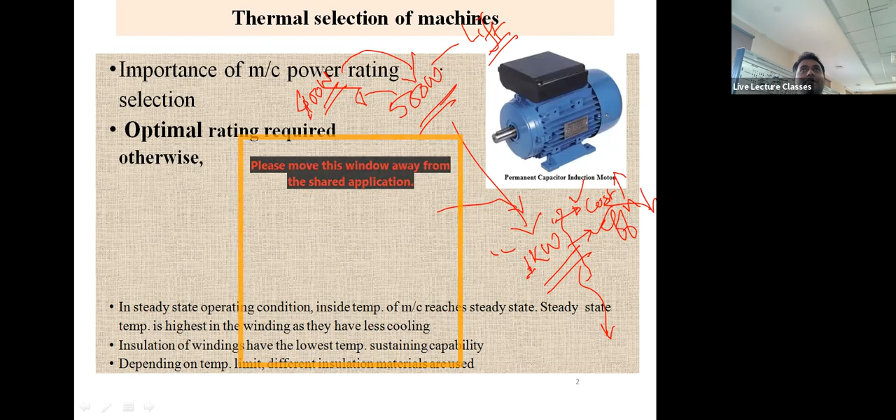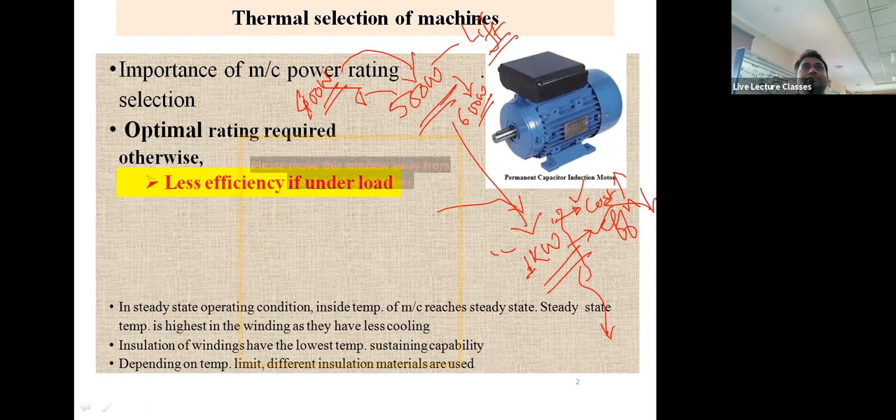And what if you have 500 watts and you are giving only 400 watts? Say this is a lift, a small type of lift that needs 500 watt of power. If you're applying 400 watts of power, what will happen? It will take up the load up to some extent because the difference is low, but overheating will be happening. And then efficiency will be down because you are running the motor above the rating, and there are chances of failure also. So if 500 watt is its rating, you can go for hardly 600 watts motor. That is good enough.

Less efficiency if underloaded, failure if overloaded. Associated power equipments like converter, etc., may get affected. So who is driving the motor? The power electronic controller. So if you are using 1 kilowatt system instead of 500 watt and your power controller is also 500 watts, then is it not a mismatch? It will affect the power electronic item, no?

Say it is a power electronic controller of 500 watts and this is a motor of 1 kilowatt. Now for 500 watts it is working perfectly. Now suppose if the load is increasing, say 750 watts, will there be any problem with the power electronic controller? Yes, obviously, because you have kept only 500 watts. And if you're using the cheaper ones like the Chinese ones, then it will get busted after 500 watts only, because for the Chinese electronic controllers, the overload capacity is very, very less. So that's the reason why their products are very cheap. So if it is rated 500 watts, you should obviously use it below 500 watts only, because power electronic controllers, depending upon the cost and the quality, it might get destroyed also. Costly if overrated.

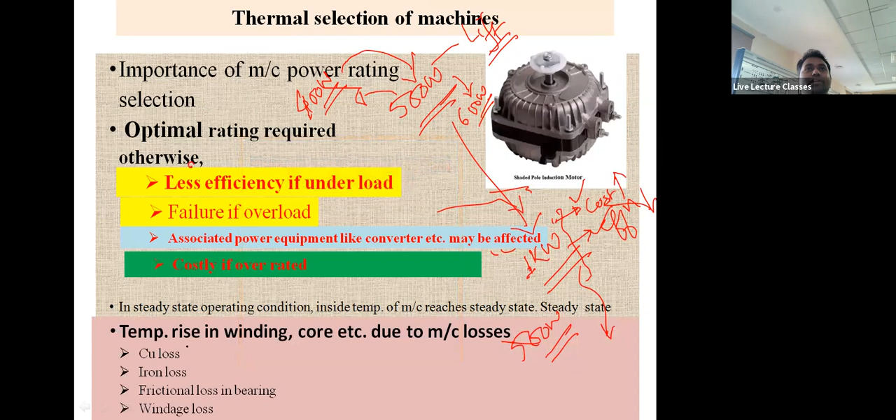So temperature rise in winding core due to machine losses. So if you are underrating the device, first of all, it may fail. And if you are overrating, the efficiency will go low. So if the efficiency goes low, the copper loss, iron loss, frictional loss in bearing, windage loss, everything will increase, especially the copper loss and iron loss.

Then the machine insulation classes. This window is disturbing very much. No, what to do with this window? Still could not get it.

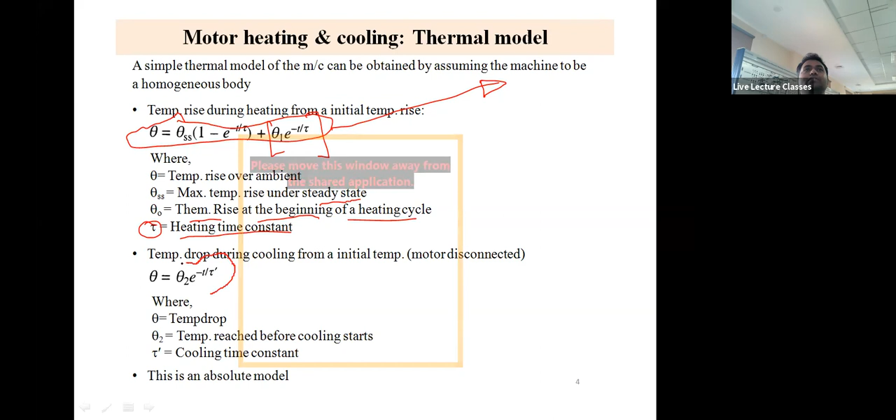So temperature drop during cooling is given by this formula. This is an absolute model, not an empirical one. It is not empirical, meaning it is calculated by maths directly. You can get the results if you put the values here.

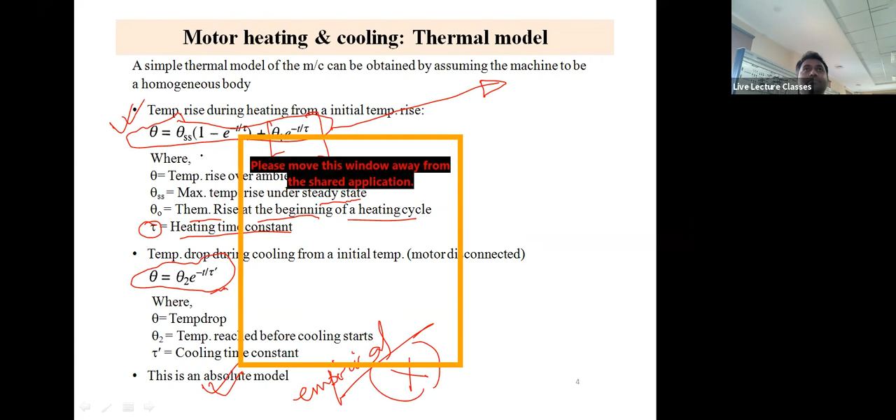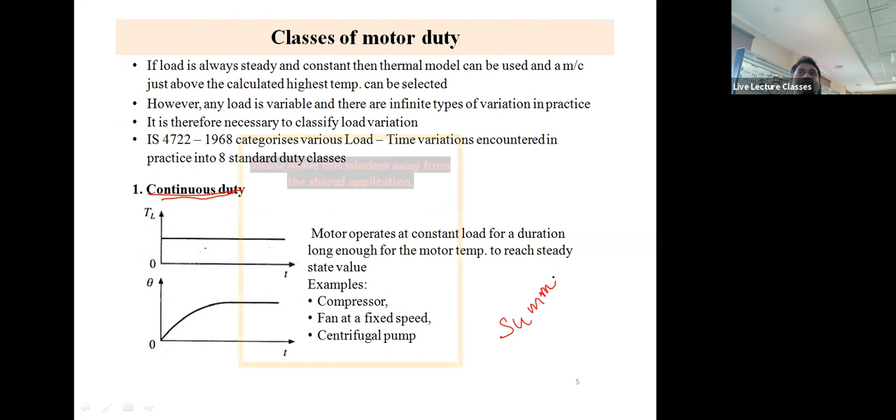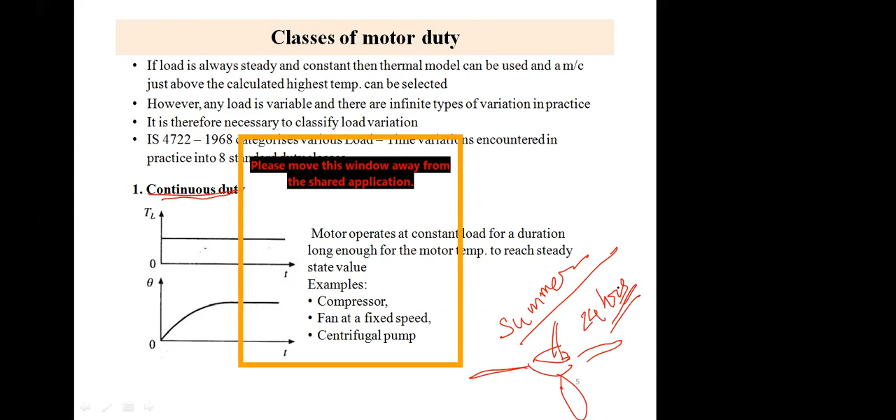So, classes of motor duty. This is very interesting. First, we are taking continuous duty motors. Like in the summer season, for how much time is the fan on? 24 hours, I think it's already on for 24 hours, right? Hardly we get it off. So if you are there in the home, it will keep it always on. So it is a type of continuous load.

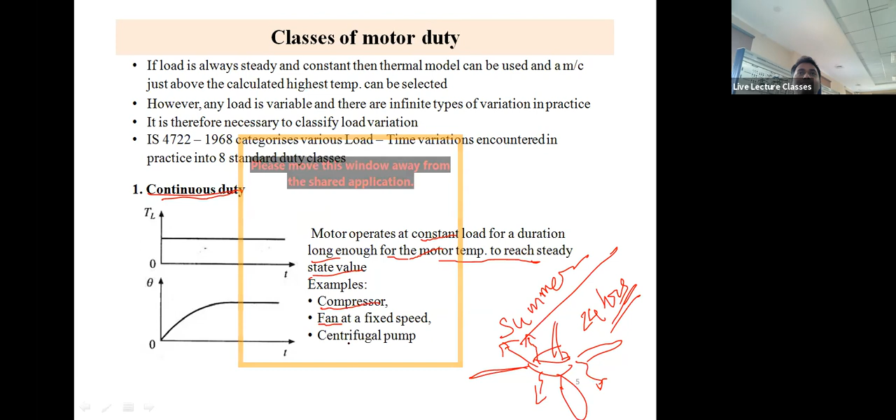The motor operates at constant load for a duration long enough for the temperature to reach steady state value. What if the temperature keeps on rising in this fan? Then the windings will burn out. So it has to dissipate the heat also, that is why it can run for a long time. Examples are compressor, fan at fixed speed, centrifugal pumps like water pumps.

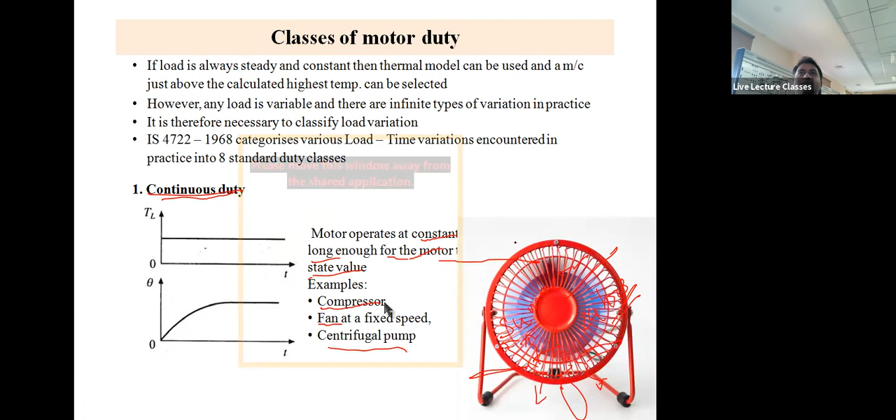So that's an example of a fan type load. Then this is the compressor type of load. This is a compressor type of load. This will rotate and the water will go inside. This will get pumped out through this pipe. That's a centrifugal pump.

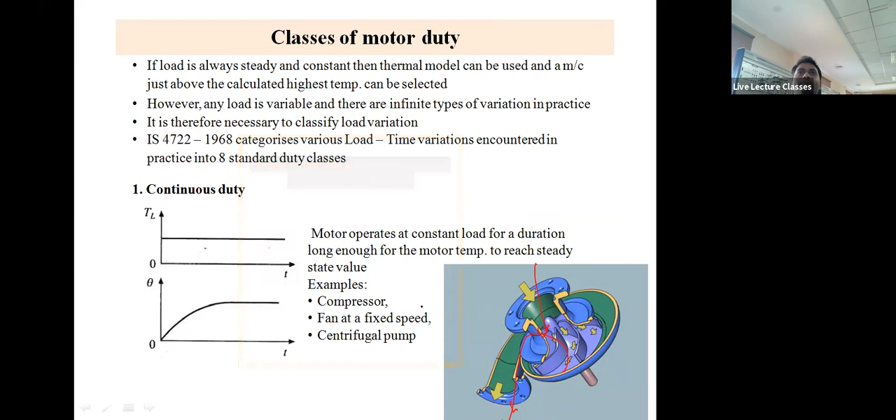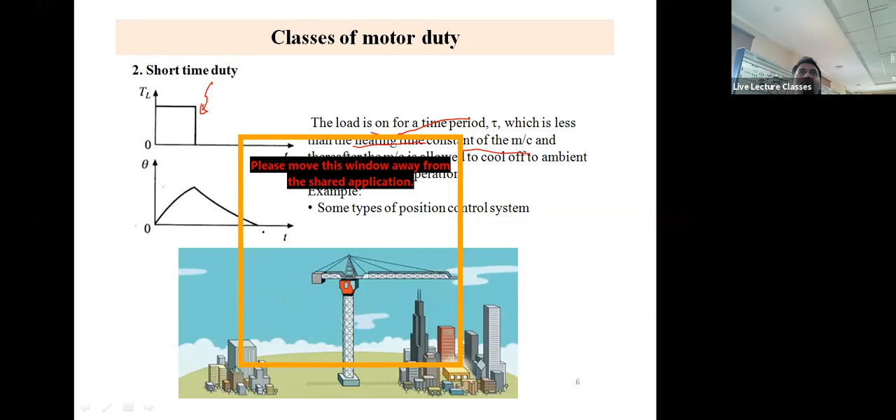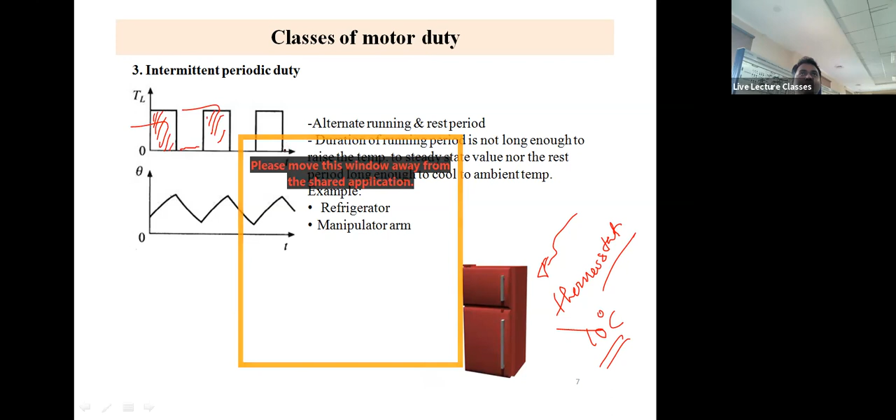Then it is intermittent periodic duty. What is this? Refrigerator. How does it operate? It has a thermostat. After reaching say 10 degree Celsius or whatever the preset value is, it will get switched off. So it is on for some time, then off for some time, and again on for some time. When the temperature increases beyond the predefined limit, again it goes off, on and off.

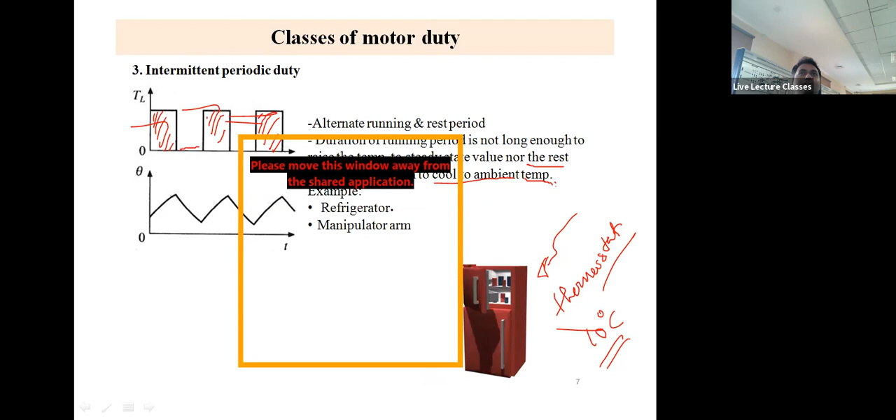So it is called intermittent duty. Duration of running period is not long enough to raise the temperature to steady state value, and the rest period is not long enough to cool to ambient temperature. I've already mailed you these slides, right? Yes, I gave to Deep, I think he already forwarded. So it's the refrigerator, the manipulator arm.

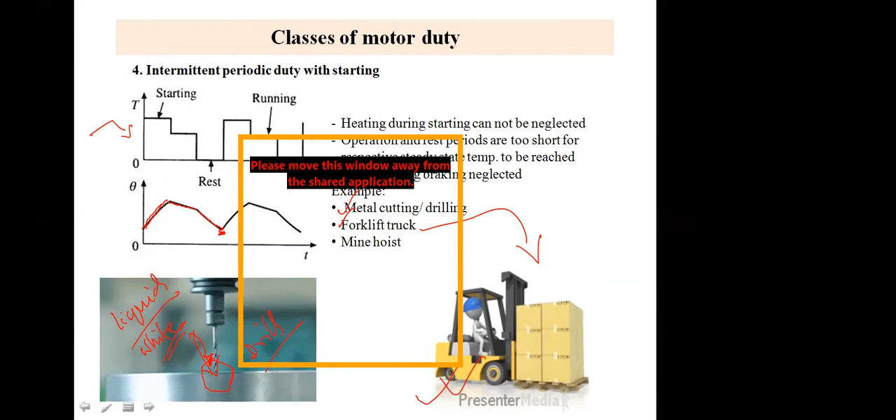Okay, think of this drill. When it is starting, why did it pause? When it is starting, say the heat is very high. Then when it is going inside, it is a bit lower heated. It doesn't have to brake, it's just resting after the drilling has been done. So that's it. And the same thing is with a forklift truck.

See, when the person is just lifting, it requires very high torque, and then the demand for torque decreases. So the temperature also decreases. So where is temperature coming from? Temperature is coming from actually the current factor, this I square R loss.

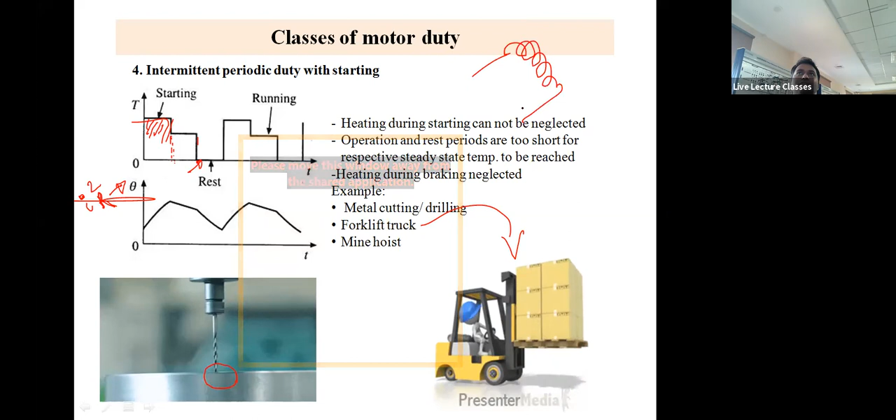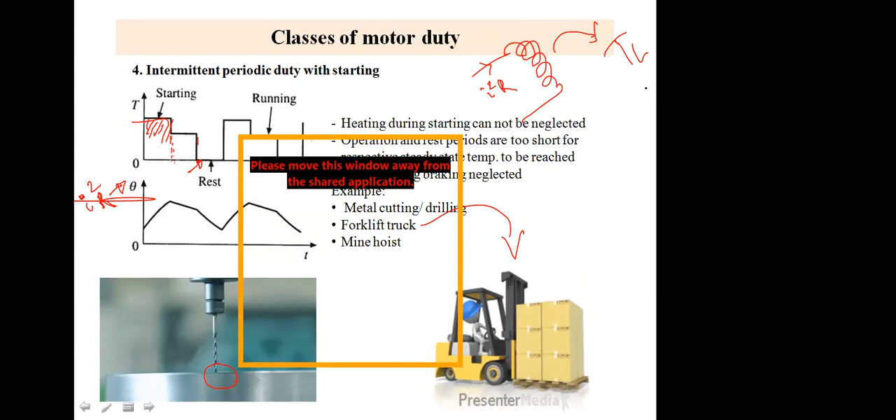First of all, the I square R loss in the motor. If it's a motor, it will have some current drawn, and it will have some I square R losses. Now this current is governed by the load torque, the requirement of the load torque. So the pattern of the load torque actually decides the pattern of the current.

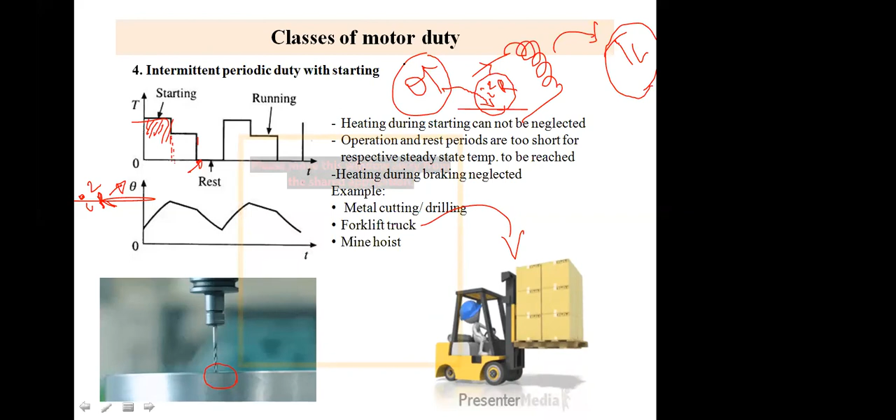And the pattern of the current decides the heat. So the more the heat, the higher is the temperature. Accumulation of heat will give more temperature. Okay? So that's the point, and so these points are being exactly followed.

So when it is starting, it is taking huge current, so the I square R loss is high, so the temperature rise is very high. And then after it has reached some type of operation steady state, it is going a bit low because the requirement of load torque during running condition is lesser than the starting. And then when the operation has gone down, the temperature goes down slowly.

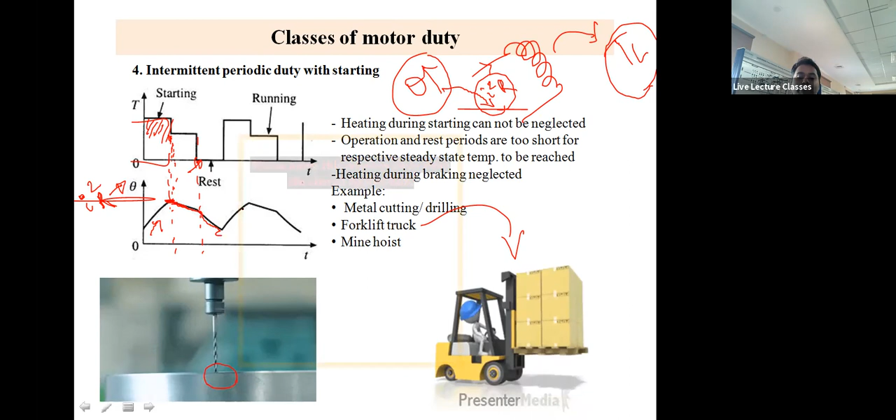Now, what about these types of loads? These types of loads are like electric trains. When they start, they will take a huge torque, right? And after it has started, it will require a lower torque to run it. The starting torque is definitely greater than the running torque.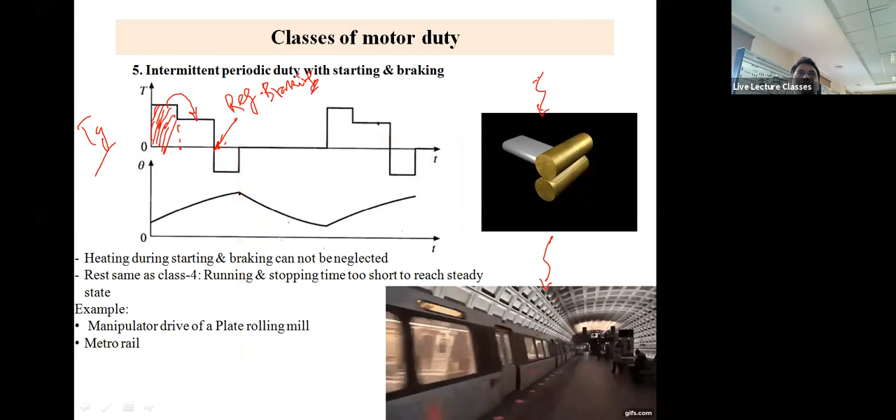And then when the station is approaching, it will go for regenerative braking. During regenerative braking also, the torque is reversed, meaning the generator torque is reversed, but there is a current flow from the load to the source. So it will first increase and then the temperature will keep on decreasing. Again at this point the train will start and it will again keep on increasing for the rest of the time. So this is called intermittent periodic duty with starting and braking.

Is it okay? Yes, sir. So classes of motor duty: continuous duty, fluctuating load, and all these things. Then determination of motor rating from the thermal point of view. Why is it important from the thermal point of view? Because after all, you need to keep the temperature of the motor at a safe limit. You cannot allow the motor to be heated just like flames.

So you need to keep the temperature lower, as low as possible. So you have to classify as per the duty cycle. This duty cycle is not that of the power electronics 4-quadrant choppers type. This duty cycle is of the load, or how much time the load will be on and off.

So motor selection for continuous duty, maximum power demand of load is determined. Say the load requirement is this much high, then it falls down to this much, and the running load is this much. This is very much evident for EV bikes, electric vehicle e-bikes. Say two persons are sitting on a bike, just imagine the amount of torque required to start it from 0 to say 10 kilometers per hour. Can you think how much current it will take out from the battery? Say it might be 100 amperes. But once it has reached a 10 kilometer per hour range, then what about the rest?

Say from 10 to 40 kmph. Yes, the requirement of running torque is lesser now. So this is called running torque. This is called the starting torque. So for the starting torque, the requirement is very high, but for the running torque it is lower. So that's why it will require lesser power.

But say this takes 100 amperes, so this is the peak, right? That is the peak current, and say in the steady state it needs 25 amperes. So just imagine you have designed a battery which can give only up to 30 amperes. So tell me, will your vehicle start with two people? Will your vehicle start? No.

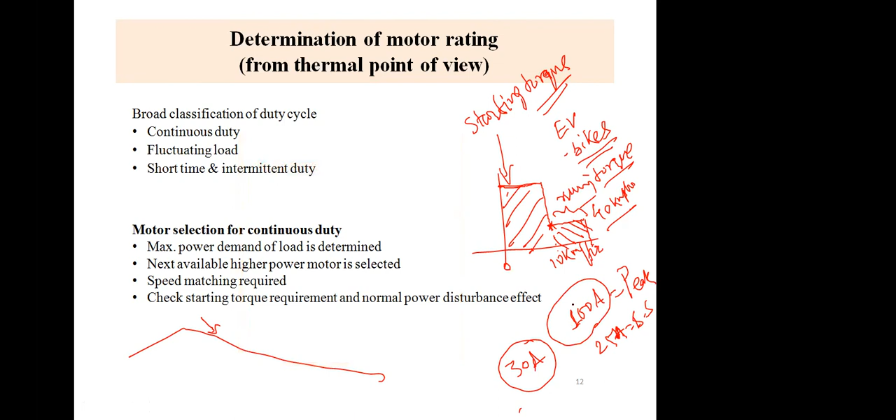Yes, it will start, but the surface has to be like this, right? It cannot be flat. If it is flat, it will not be able to pick up that 100 amperes, right? So that is the essence: if you have to start, you have to have this peak rating on your motor side and on the battery side also. The entire system must be able to give this peak rated power. Then the next available higher power motor is selected, right?

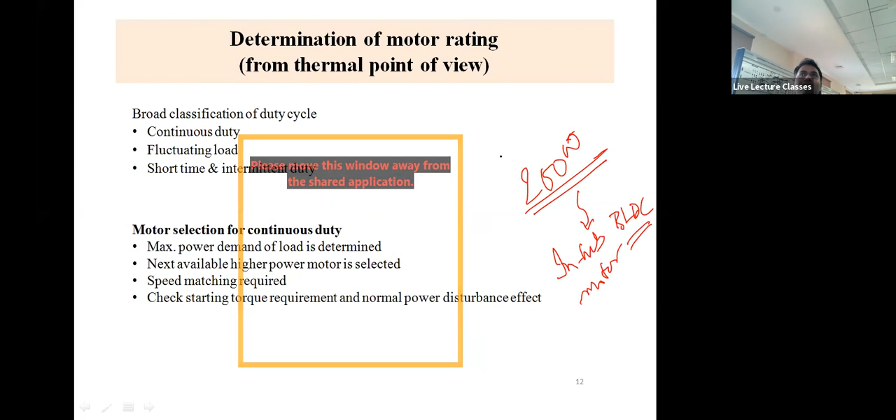Okay, can you tell me what is the power rating required to pull one person in an electric vehicle? It's 250 watts. So every electric vehicle will have this 250 watt BLDC motor fixed in them. It's called an in-hub BLDC motor. Now this is approximate. If you're much lighter, it will draw lesser power, so your battery mileage will be more. Approximately, 250 watts is what one person needs.

Guys, please don't talk.

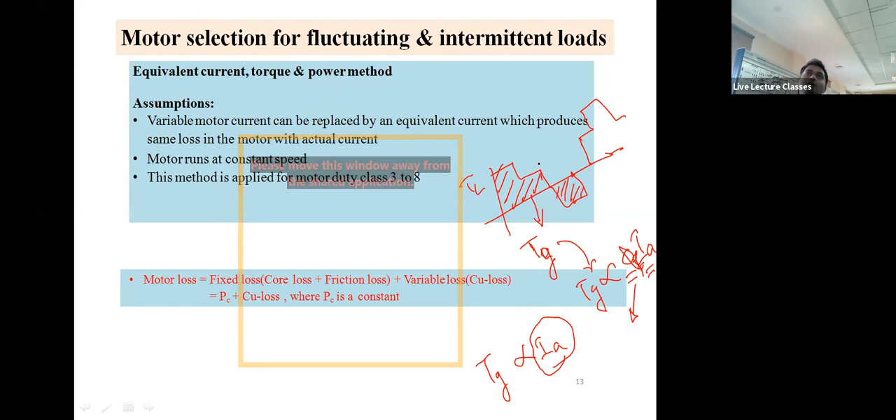So if you are going to buy a motor, how will you buy it? Its current rating must follow the pattern of the load torque. It must be able to pass say 100 amperes at starting and 25 amperes at steady state. So can we have an RMS value of this, like we used to have for currents? For sinusoidal current, we used to take the RMS value, right?

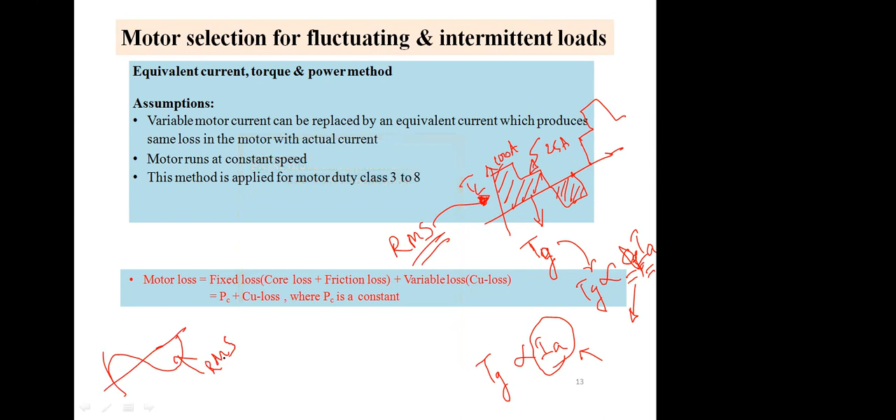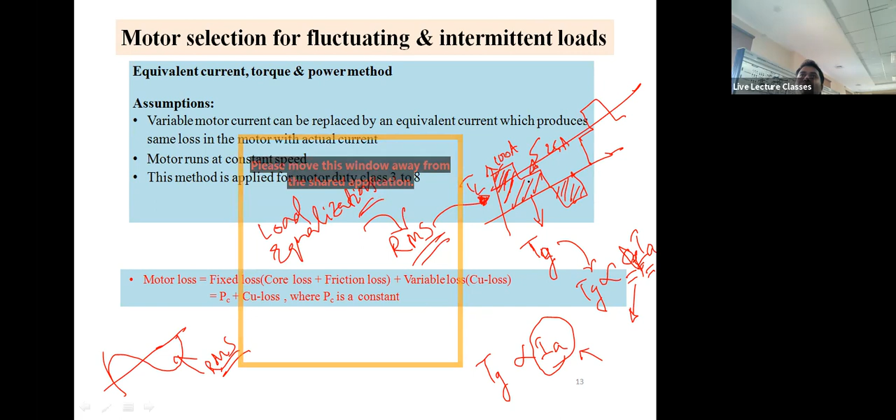Yes. So we have to take an RMS, and that is called load equalization. You are trying to manipulate these fluctuating loads into a flat load. You are trying to have a mathematical form to get a single motor rating which will handle all the fluctuations of this type of load. Is it okay? Yes.

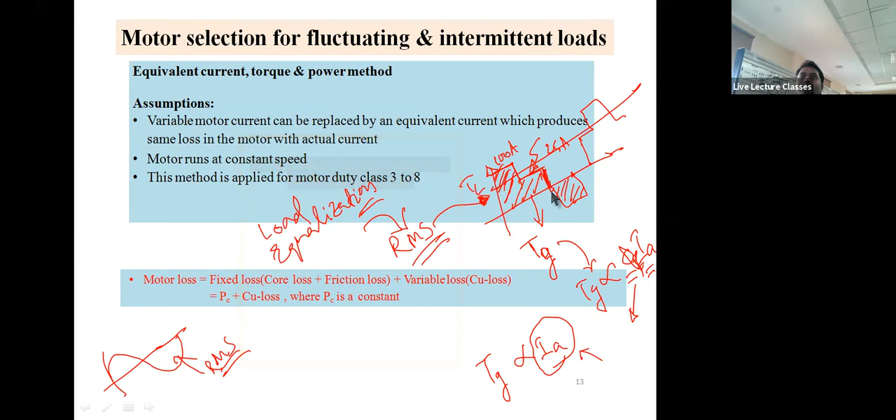Okay, so this method is applicable for classes 3 to 8. You will have already got the slide. Sorry for this window, till now I am unable to fix it.

Okay, so the equivalent current, torque and power method is this one. Variable motor current can be replaced by an equivalent current which produces the same loss in the motor as the actual current. This is the principle for RMS calculation. Motor loss is a function of fixed loss, that is core loss plus friction loss, plus variable loss, which is the copper loss, the I square R loss. And core loss, I think everyone knows.

That's the same thing as of a transformer. Then this is the arbitrary fluctuating load. This is a model. Say your model is consisting of this type of load torque, so this is the value of I1, this will be the peak, right? Is it not the peak? Yes. And then you have again a low.

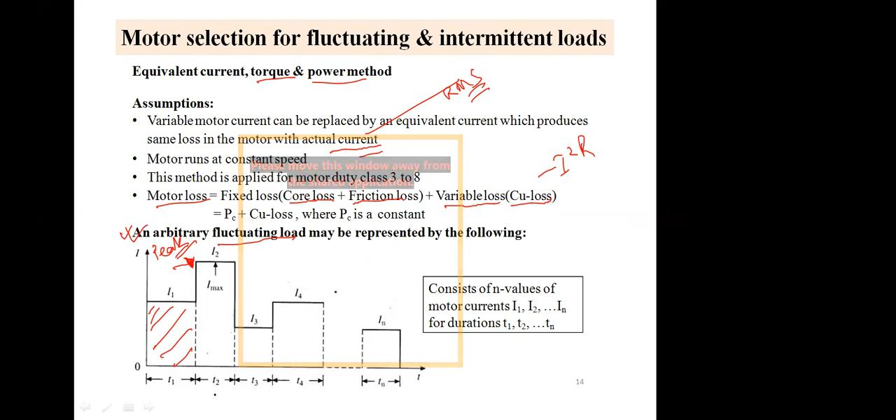So say your motor should pass this peak current at least for some seconds. Yes, for some seconds. But if you keep the motor rating up to this also, then also it's a loss. Say this peak needs a power of say 2 kilowatts, right? But this needs a rating of say 1 kilowatt. So which motor will you try to buy? Tell me. And this is 1.5.

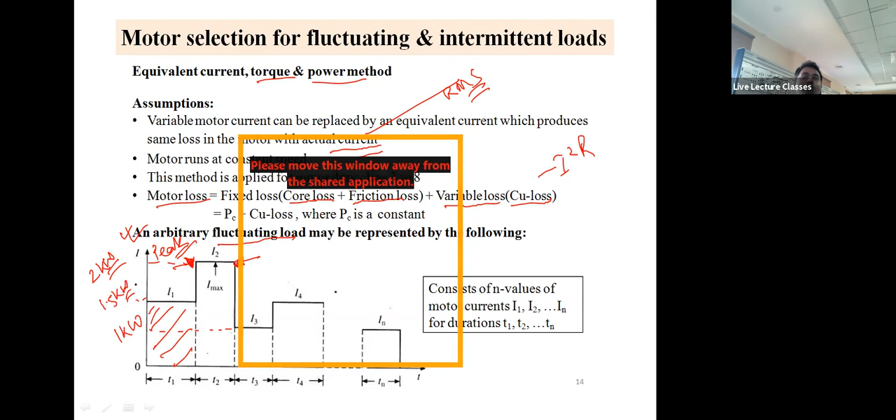So the essence is that you will try to buy a motor in between 1 and 1.5 kilowatt that is able to handle the 2 kilowatt peak load for some time, right? Yes. So that's the reason why we are going for load equalization. We will take the values of T1, the values of I1, similarly for I2, T2, all these things, and then we'll fix it up with load equalization, which will have the RMS values.

So we're trying to have a lower cost of motor, optimal cost of motor, optimal rating of motor, which will be able to handle this high amount of load for at least some time. Say for 2-3 seconds it can handle 2 kilowatts. That is also good enough, right? But the main RMS rating of the motor is only 1 kilowatt, right? So the cost will be lower, instead of having the full rating as 2 kilowatts.

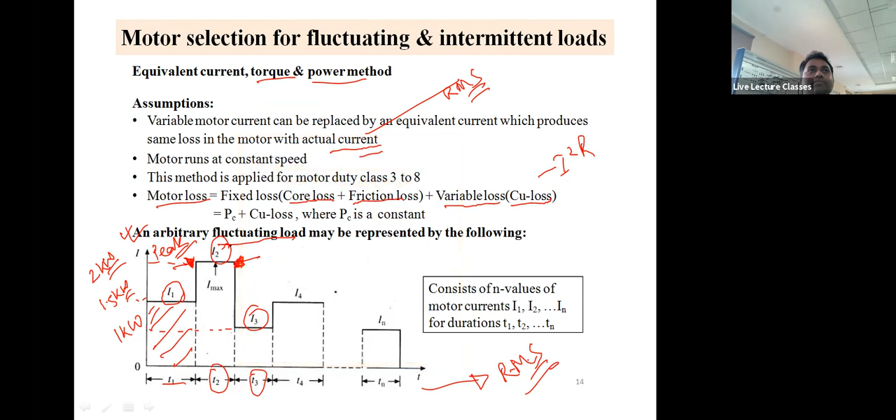So this is the formula which you can see here. So equivalent current IEQ is given by, this is the constant loss and this is the variable loss, is equal to, yeah guys, please see this. This is the constant power loss plus I1 square R T1, that is the I1 value for T1 seconds. Then this is the PC again for I2 for T2 seconds. Similarly for all the losses.

Now, how will you find it out? So if you take PC in common, you end up doing this calculation, and so IEQ will be this. So this is the equivalent RMS current for which you should find a motor in the market. So say this is 5 ampere. Suppose this is 15 ampere, say. So which rated motor should you find? Say 230 volt. Will you go for 15 ampere if it is not there?

Say for this type of motor, 15 ampere 230 volt, you go to the market and the market has the following varieties. Say which one will you take? Will you take this? No. Why? Because it is underrated. It will not be able to handle the peak load or the steady state load, or the starting torque. So this is rejected.

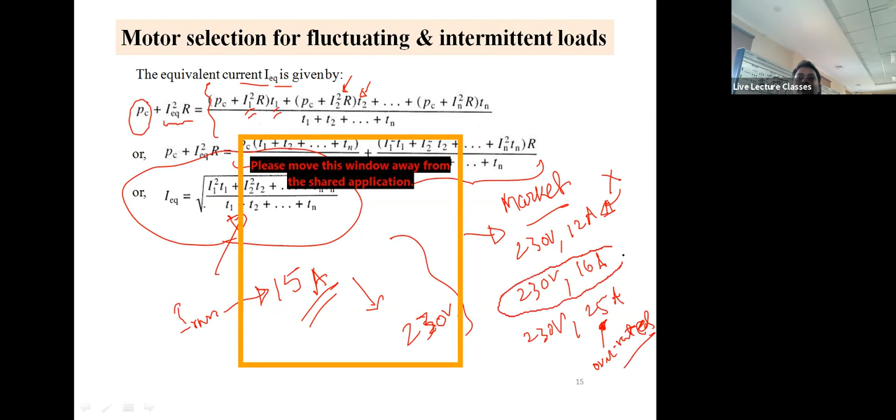Will you take this? We'll consider. Obviously you can take this if you have lots of money, right? But the majority of people will not be buying this because this is an overrated motor. Instead of 15 ampere, you are taking 25 ampere, so that's called overrated, right? So you can do it, but it's a loss of money. So the most economical is this motor, 230 volt 16 ampere, right? So you have to find the motor rating in such ways. So motor rating will come in VI cos phi.

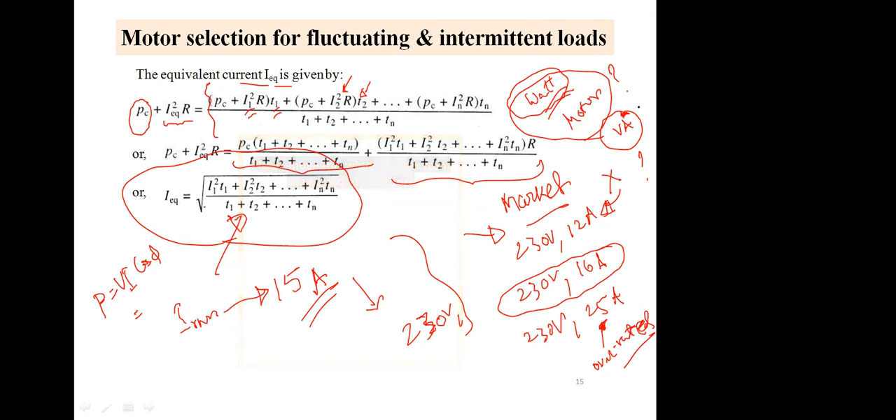Why is the motor rating in watts, and why is the output of a transformer in VA? Motor rating is in watts and the transformer rating is in VA. Why? Because transformer rating doesn't depend on cos phi. The rating depends upon the type of output you want. A motor will give you a physical rotational output, that's a mechanical output, which is real. So real is watts, right? And electrical output is given by a transformer, right? So it consists of the real power and the reactive power also, right? So it is in VA.

So how much maximum power can we go for? There is definitely 1.5 into 500, right? It's 750 watts, right? But this overload can be taken only for a less amount of time. So DC motor normal overload capacity is 2 times. That's a great thing, right?

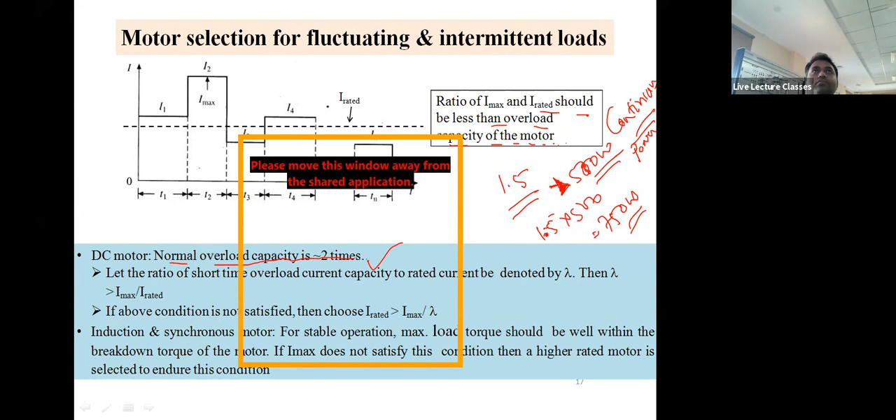That's very obvious. So that was the end of unit 1, right? And the torque equivalence will be coming in the same style, right? So T equivalent will be equal to T1 square for T1 seconds, then T2 square for T2 seconds, and finally divided by the time, and this is the square root. So this is the RMS, root mean square, right? So this will be the torque rating of the motor. This will be the power rating of the motor, equivalent power rating.

So are they two different? The formula seems to be the same one, but are they different? Obviously, it's different. Why? Because a motor may be of the same power, but it might not give the delivered torque, because power is equal to T into omega. So it might give you a greater speed but at a lower torque. So that is also not acceptable, right?

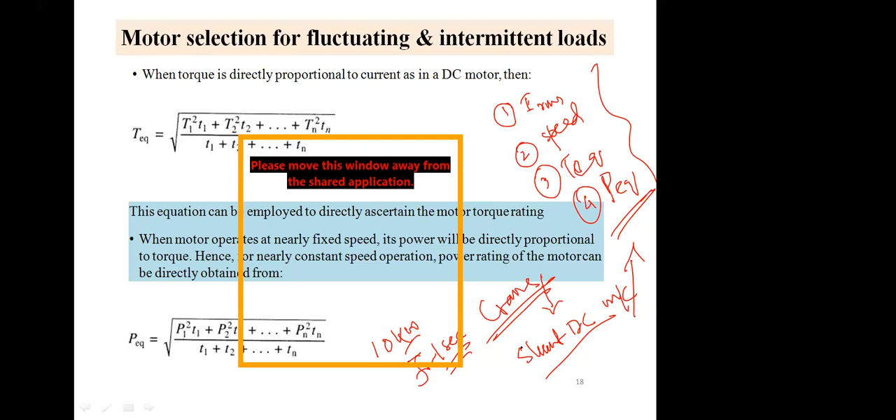Say you are trying to go for a crane type of load, and you are employing a shunt DC machine. Will it be able to do it? No. Say the crane needs to pick up a power which is equivalent to 10 kilowatts for 1 second. So will you be going for a shunt DC machine? And will you be focusing on the continuous power rating? No. Intermittent. So you will be focusing on the peak power rating, right?

You will be focusing on the peak power rating, the overload capacity, because you will be employing it for a very small time, 1 second. So that's the good thing, right? So you will get the motor at a lower cost also. But the associated power electronics, if it is there, has to be also rated for such high watts. So that is also another concern, right?

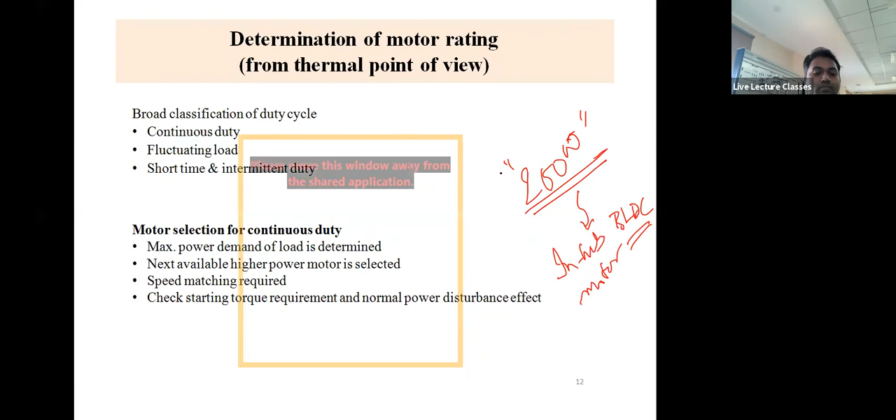Okay, so that was the end of the slide. Any doubts till now? Any doubts till now? Okay, you're welcome. Are there any doubts from here?